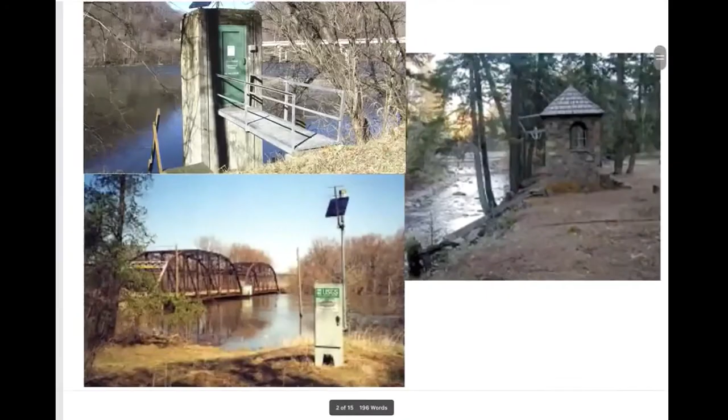All right, so first thing we're going to start with is just some field equipment. You don't have to draw this or write this down. It's mostly just as your FYI, because when we're talking about the weirs, the purpose of the weir is to get very calm waters so we can measure our stream flow. So this is just talking about measuring flow rate.

So what we would have in the field is this kind of tower here. It looks kind of like a little house, and then underground there's some connections. The connection essentially measures, so here is where we're measuring the pressure head.

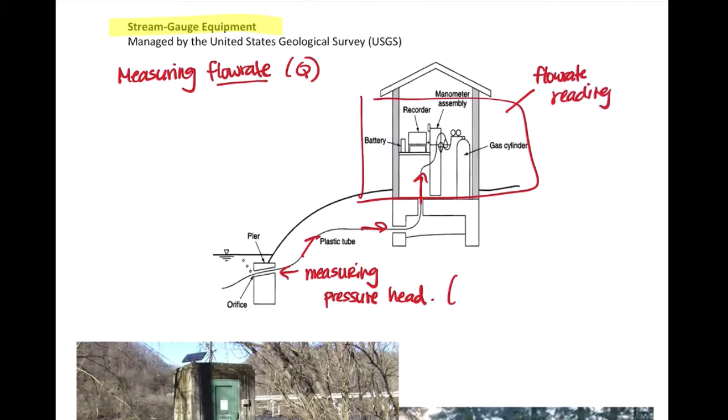That information is passed back to the machinery in here, and this translates to a flow rate reading, because the piezometric head, or H, from years and years of gauging and measuring, there's a relationship between that piezometric head and flow rate. And so this makes that calculation, and it estimates the flow measurement.

Now, back then, that information was recorded on site, and somebody had to hike into the site and download the data, very old school. Now they actually have an antenna attached to the site, and that is transmitted to a local station, so we get real-time measurements of flow rate. Someone's usually behind the desk to make sure the data makes sense.

So these are examples of what they look like. This one's one of my favorites, this is like a little house on the side of the stream. So if you're ever walking in your favorite watershed and on your favorite trail, and you notice a house like this, that's most likely a stream gauge.

This is also a stream gauge managed by the USGS, which is the United States Geological Survey. And this tower is actually very high up, because this is a very, very large, very wide river, so the channel depth can get very high. So it's at a higher elevation, very high up, to basically account for that, so it can get an accurate measurement of that piezometric head.

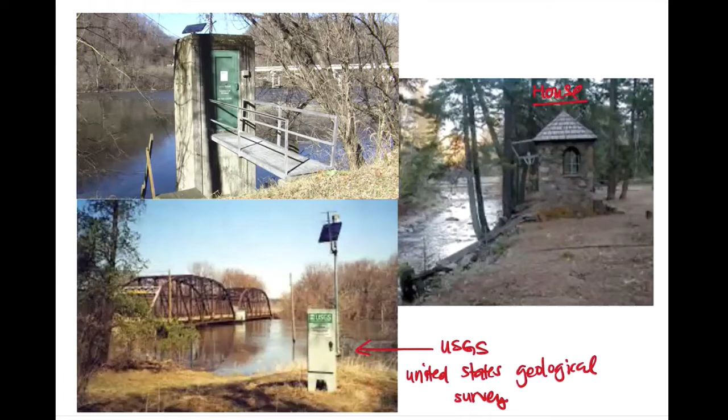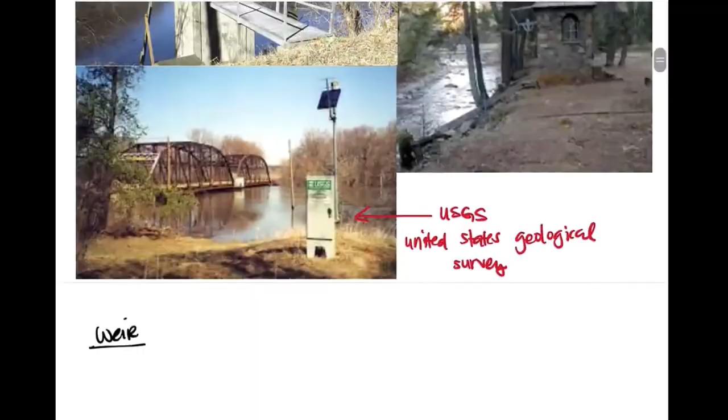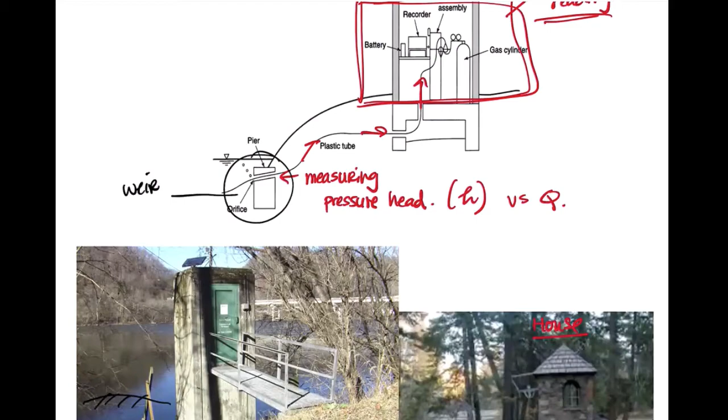So these are examples of how you would measure that flow rate. I want to get into the types of weirs and what they're used for. So what you can't see in these pictures is that on the side of the river is usually where you would see this structure, which would be the weir. So it's showing here, this is the weir, and they're hand in hand. Where you measure the flow rate in the river, you would have some kind of weir, some structure in the river to give us these ideal flow conditions.

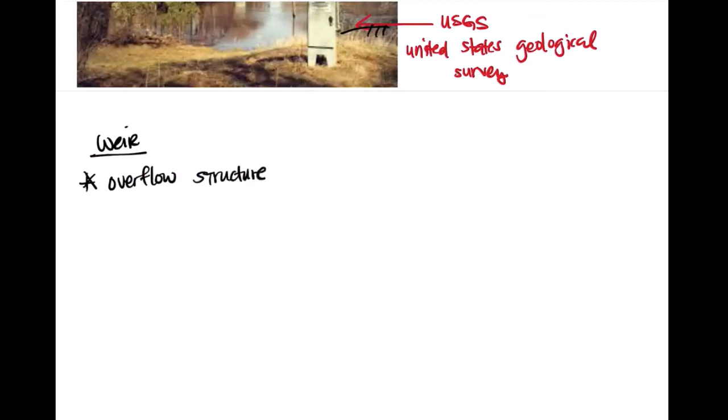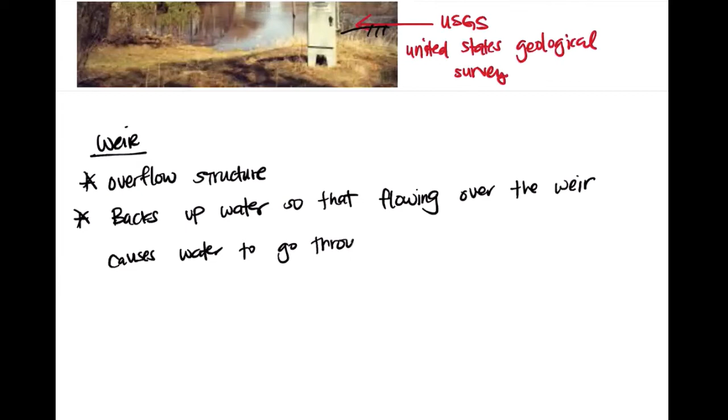So the weir is an overflow structure. It backs up water so that flowing over the weir causes water to go through the critical depth.

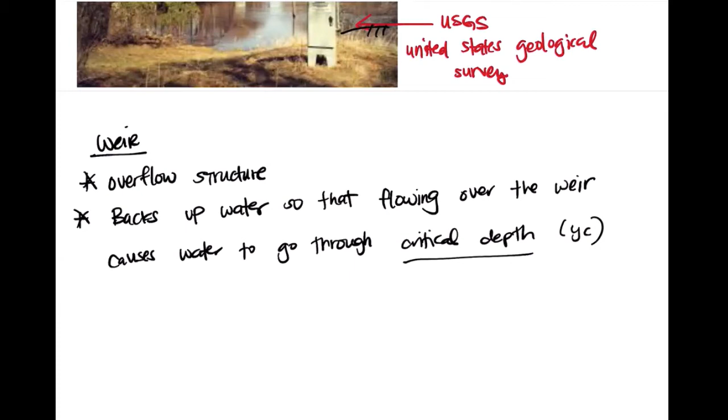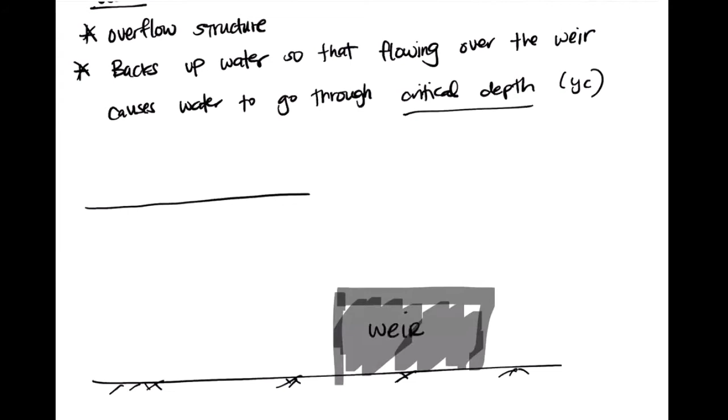Okay, I'm going to go into my notes and copy and paste some pictures to fill in. Actually, I can just do a sample here. So here's the water backed up, and then we have this structure here, this would be my weir. And what's happening to the water as it approaches the weir, it actually starts, the level starts to go down, until it falls over the weir.

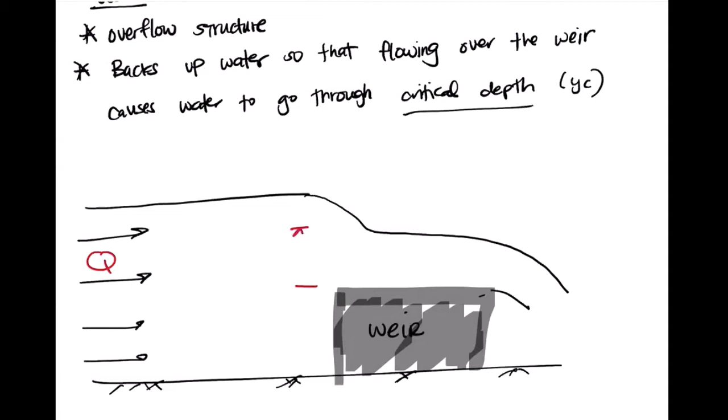So you have some flow rate approaching, right? You have some elevation of the water height above the weir, that's called H. Again, that flow rate is conserved as you're traveling over the weir.

There's different types of weirs that you could have. So this is a drawing of what's called a broad crested weir, but there are many, many types.

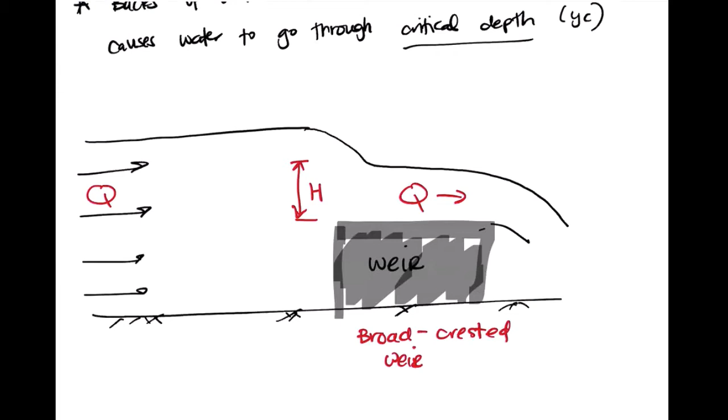So what I'm going to do is I do have photos of what those weirs look like. So this is the first type of weir, it's called a suppressed rectangular weir. What's different between the broad crested weir, which is a very wide structure that I drew earlier, this suppressed rectangular weir is actually quite narrow. So this is an example here in the field of that suppressed rectangular weir, it's very thin.

So it's a thin structure, and there's something called a nappe, where the nappe is that overflow, the width of that overflow. So the width here of your suppressed rectangular weir is about the width of the overflow. So that nappe here, super narrow.

And as the water flows over the weir, somewhere around here we have our critical flow. Back here we have subcritical. And over here we have our supercritical. Okay, so this is an example of the rectangular weir.

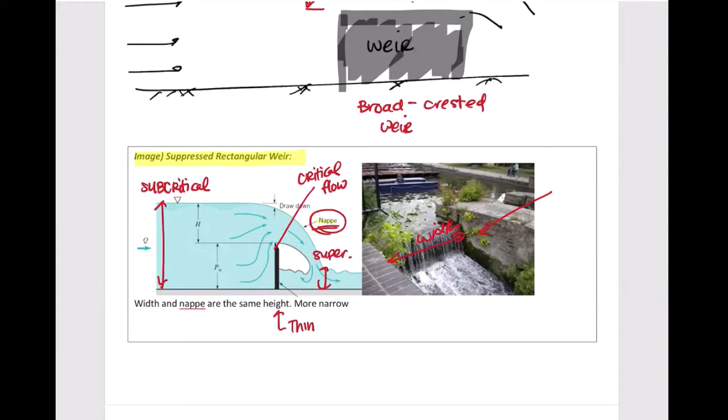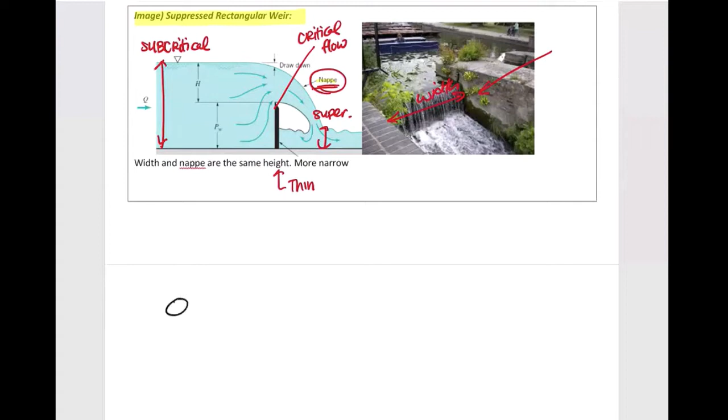The other weir, let's add some equations. So typically what you would be calculating is either the flow rate. So the flow rate is equal to CW B H to the 3/2. So you would typically be calculating either the flow rate, or perhaps you're given the flow rate and you might be calculating H, where H is that elevation above the weir to the top of the water.

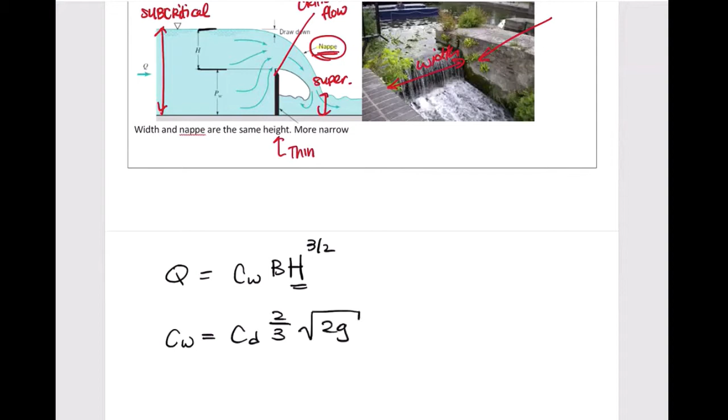So to calculate this, I have to provide some constants. CW is CD multiplied by 2/3 multiplied by the square root of 2 multiplied by gravity, where CD is approximately 0.62. So this is a coefficient that's used to calculate that

coefficient for the weir. So the only difference between the calculation is just going to be your gravity value. So there's some standard values where CW is approximately 3.334 for BG units, or 1.84 for SI units. Okay, and CW is called the weir coefficient.

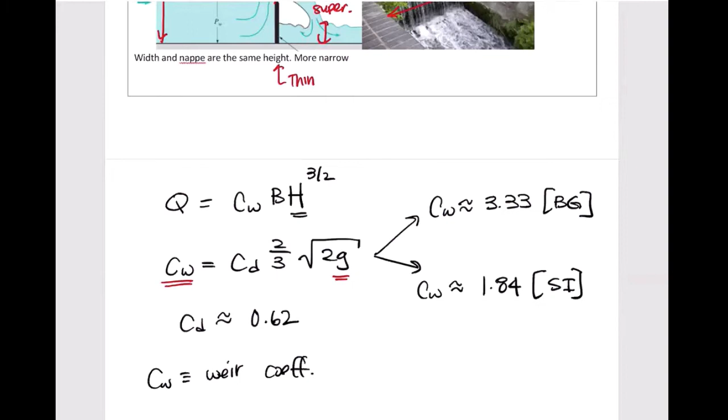B is equal to the base distance from crest to still water, which is not included in the drawing, but it's actually right here. So you have some distance B here. So in the problem statement, it'll typically say something like, how

high should the weir be placed if we're to maintain an upstream depth of blah, blah, blah, blah. Or we would say something like the distance from the flow measurement to the weir is approximately 5 feet. So that would be your B.

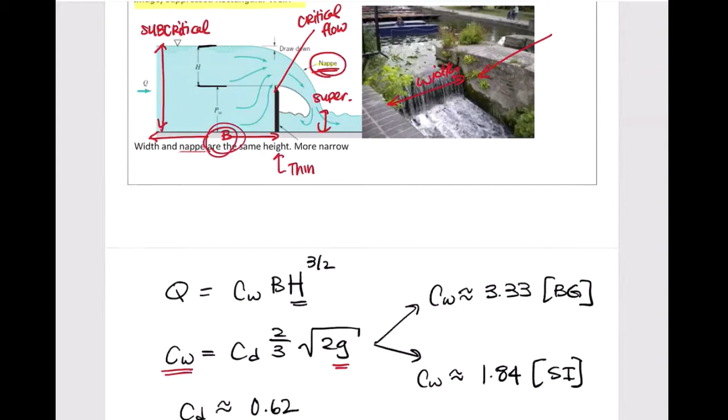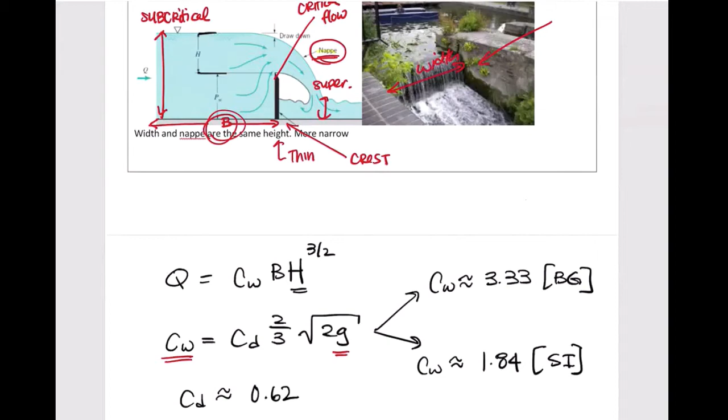Is the crest labeled in there? Oh, this is the crest, sorry. The arrow's cut off. That is your crest. So the distance from the weir to some upstream distance where we have some flow measurement, or where we have some standard height of the water.

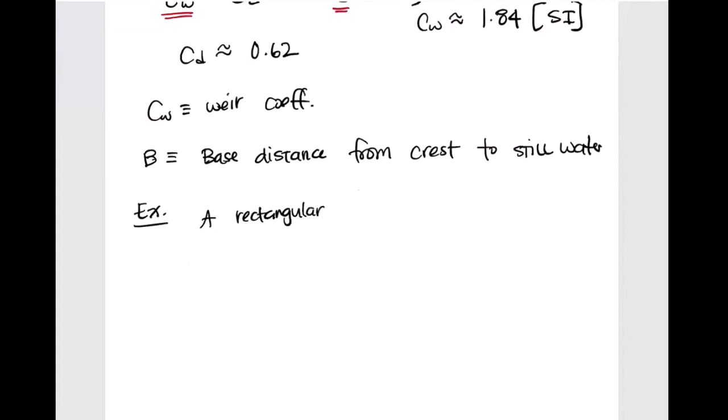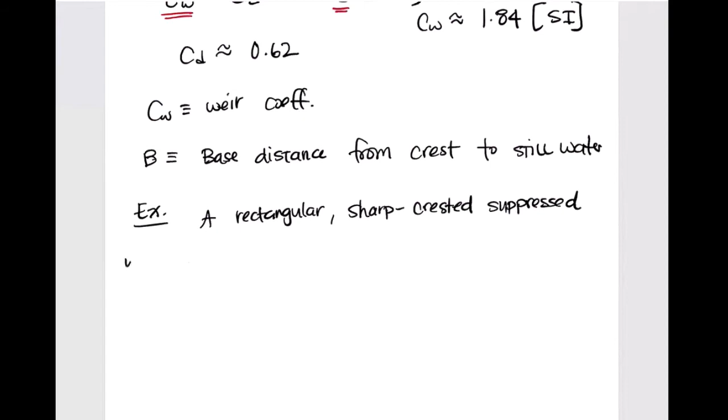Okay, so let's do an example using this equation. So we have a rectangular, sharp crested, suppressed weir that is 3 meters long, is 1 meter high. Determine the discharge when head above the weir is 150 millimeters. Okay, so we're in SI units, right?

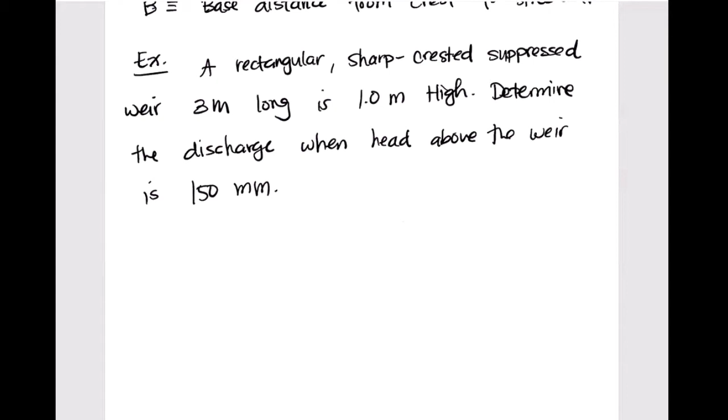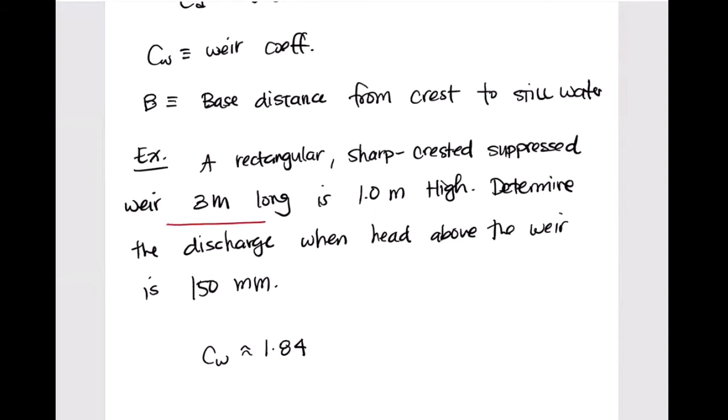We're in meters. So that means our CW is approximately 1.84, okay? We're given that the sharp crested weir is 3 meters long. That is going to be our B parameter. And let's see, what else do we have? We have our head, this is going to be our H.

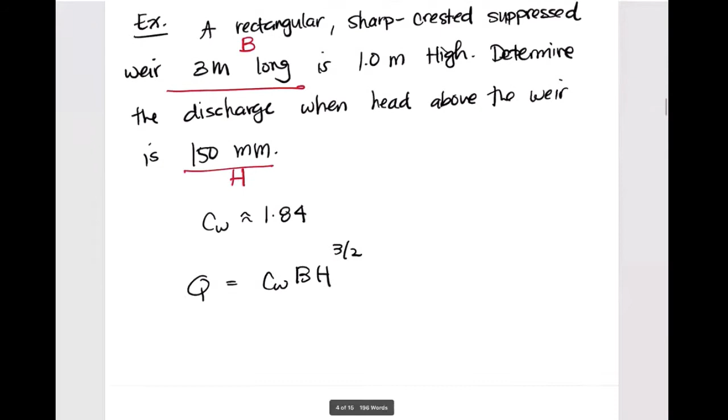So Q, which is CW B H to the 3/2, is 1.84, B is 3 meters, H is 150 divided by 1,000 meters, to the 3/2. So what is my flow rate going to be? 0.32, and that's going to be meter cubed per second. Okay, if you're not paying attention, I'll just let you know the next problem is not going to be this easy.

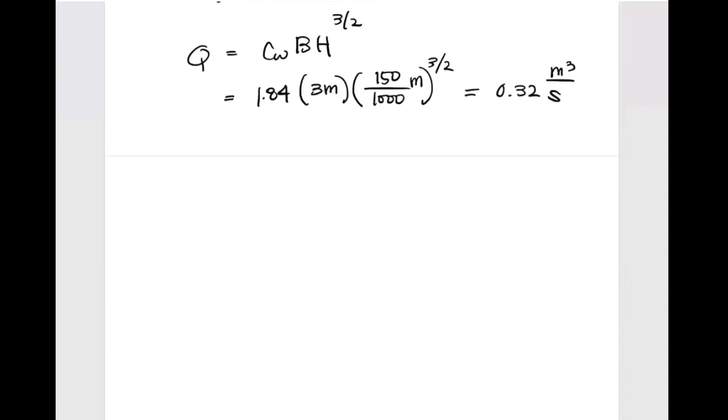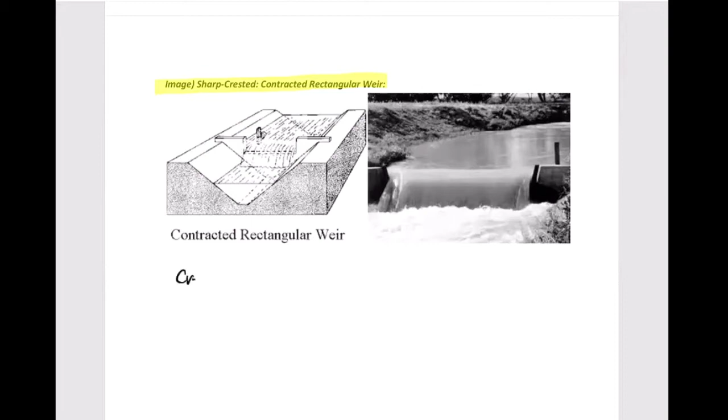Okay, so that's one type of weir. That's the sharp crested suppressed weir. The next type of weir is a sharp crested contracted rectangular weir. For this particular weir, the crest is shorter than the width of the channel.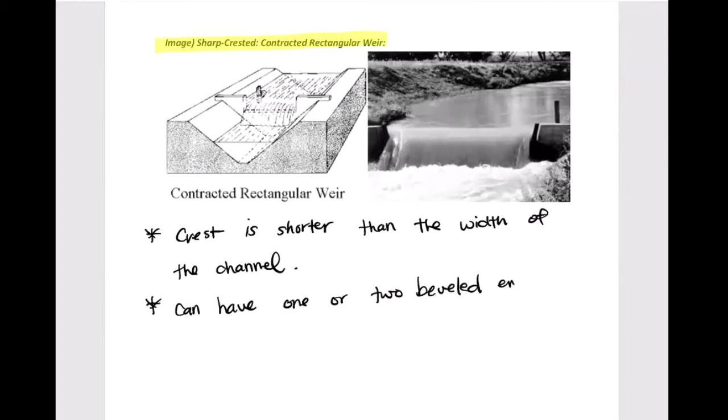It can have one or two beveled end sections. So water contracts horizontally and vertically.

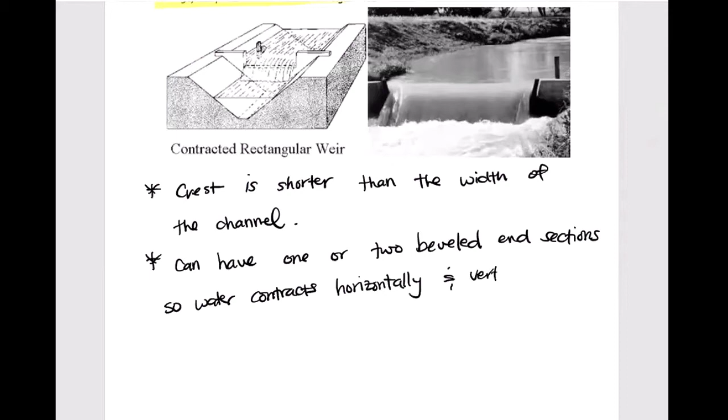Okay, so here is a drawing showing these contractions. So this right here and this right here, these are our contractions. Okay, and it kind of shows you that there's this structure right underneath the water that causes it to contract, vertically as well as horizontally. So it's contracting here and here.

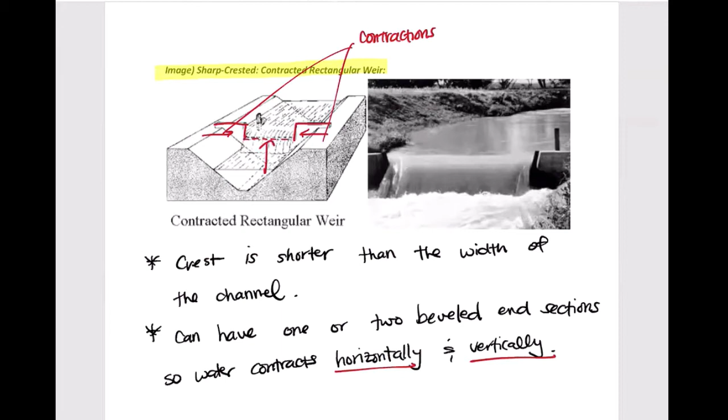Now, you don't have to have two contractions. You can have one contraction, that's fine. You just have to make note of it because that does change your calculations a little bit.

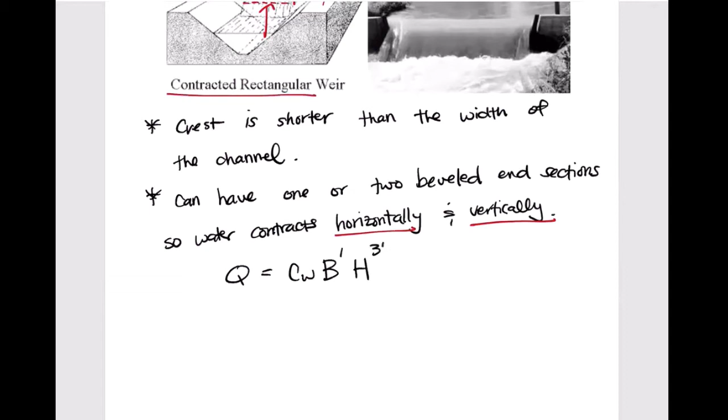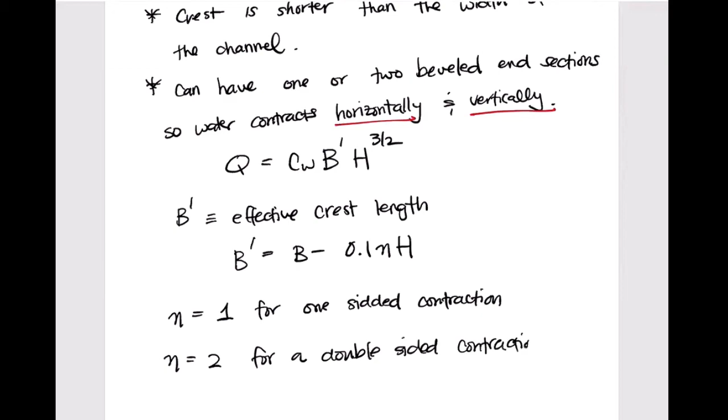So the equation for the weir flow rate does not change. However, instead of B, it's B prime, specifically for the contracted weirs. So it's B prime H to the 3/2, where B prime is called the effective crest length, and B prime is equal to B minus 0.1 NH, where N is just the number of contractions. So it's 1 for a one-sided contraction, or N is 2 for a double-sided contraction. So if you go back to the picture here, this would be a double-sided contraction, okay? So N would be 2.

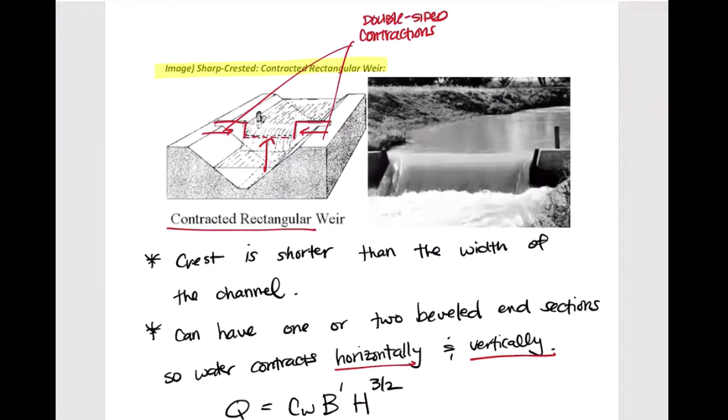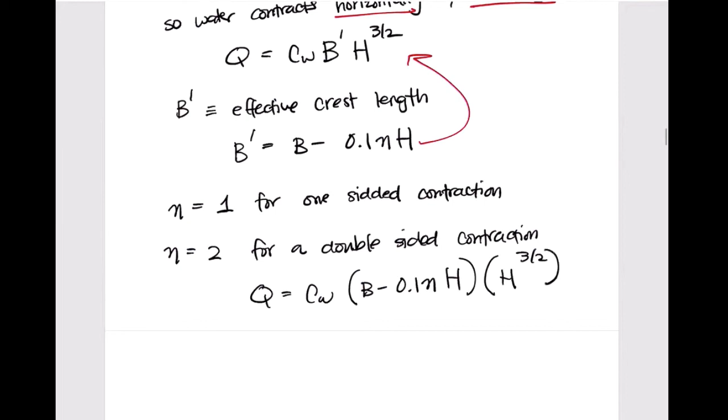Okay, so this can actually complicate things a bit, because if you put this B prime into this equation, then your Q is CW multiplied by B minus 0.1 NH, multiplied by H to the 3/2. So when you distribute that H, this is going to be H to the 3/2 multiplied by CW, B minus 0.1 NH to the 5/2. Do you see that?

If you have a problem similar to the previous example where H is given, if you know H, then this becomes a plug and chug. But if you don't know H, then what does this problem become? It becomes an iteration problem to solve for H. So I'm going to put a note here that if H is unknown, then you must iterate to solve. That is the contracted rectangular weir.

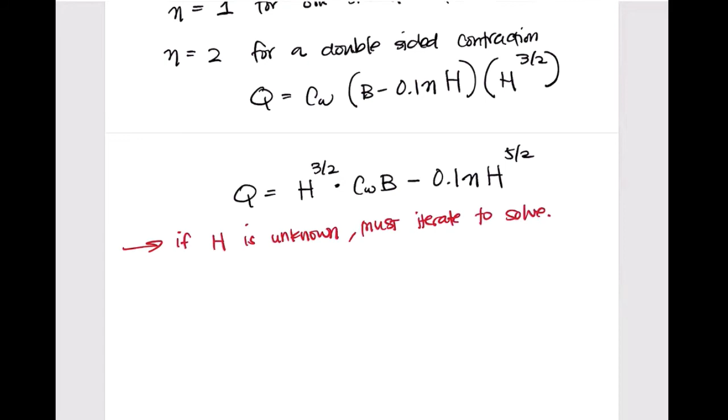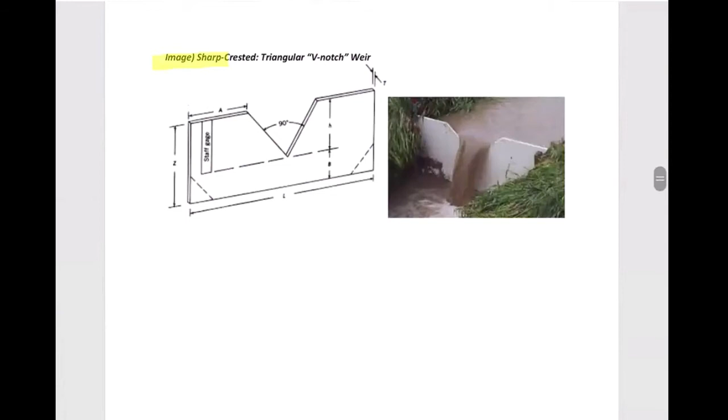We have 2 more weirs coming. So the next type of weir is a sharp crested triangular V-notch weir.

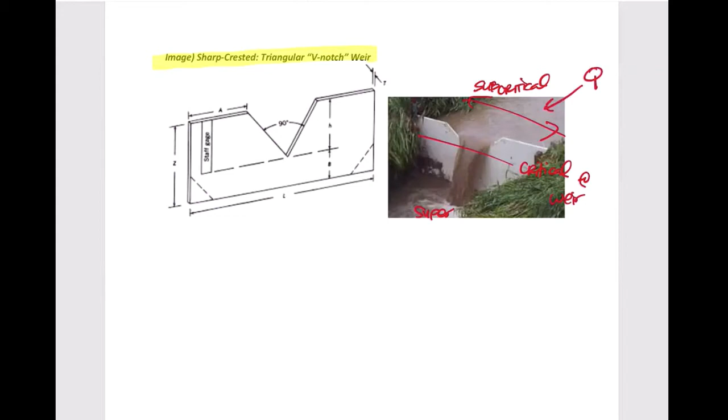Again, the whole purpose of the weirs is to back up the flow, create this critical condition. We have subcritical conditions in the back end, critical conditions at the weir, and supercritical on the release side. It's to get that controlled flow so we get a reasonable estimation of flow rate, because we need to back up that depth in order to get a reasonable estimation. Flow rate here is the same as the flow rate here, via conservation of mass. It just makes it easier for us to get that measurement.

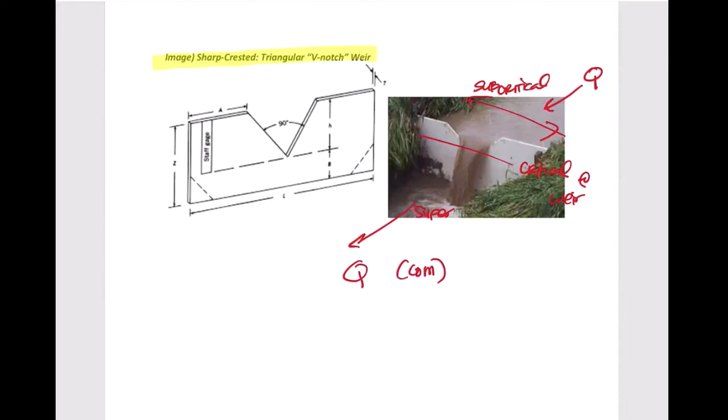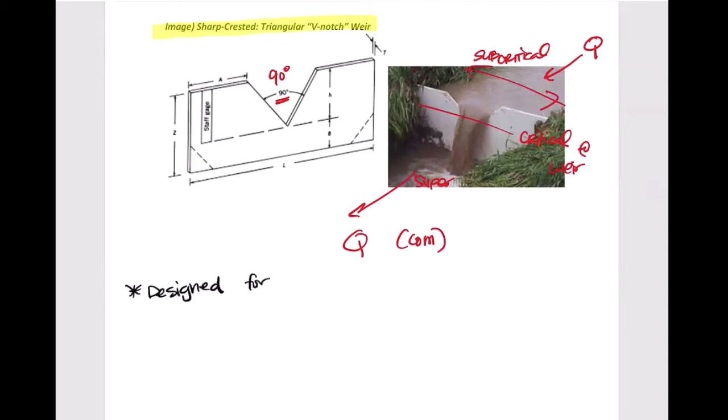So this is our triangular V-notch weir. As you can see here, this angle is 90 degrees right here, so that is the most common angle. It's typically what we use for a triangular weir. It's designed so we use these types of weirs for relatively small flows, to back up the head, back up the water, raise the water height so we can get a decent flow rate measurement.

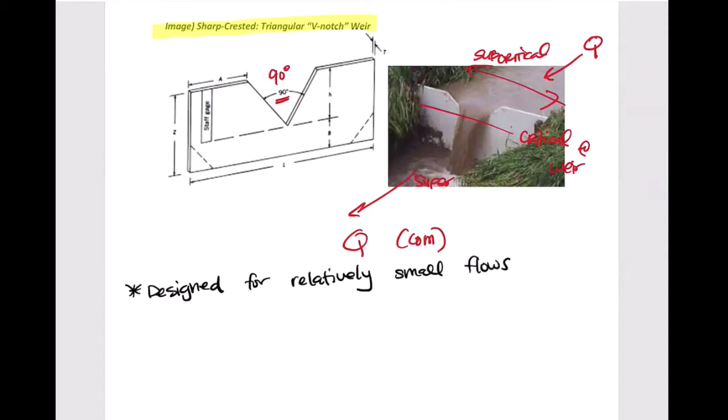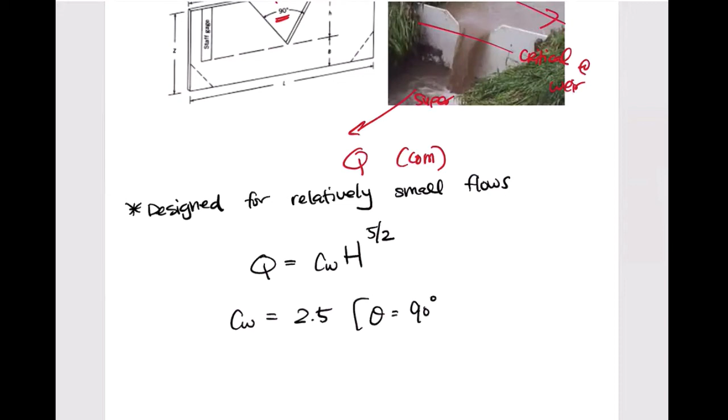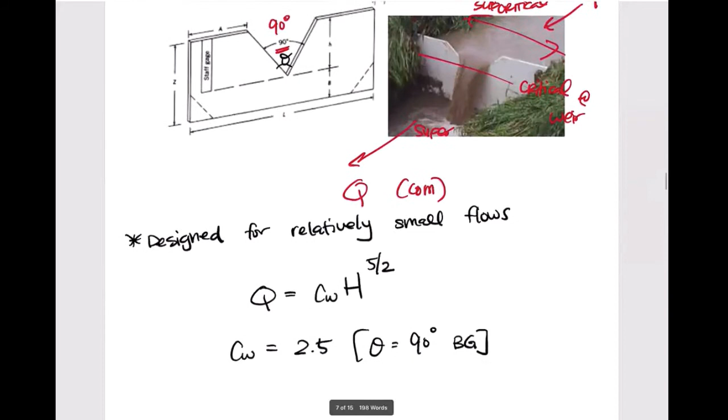The equation specifically for a triangular V-notch weir is Q equals CW times H to the 5/2, where CW for this particular type of weir is 2.5. Again, that's for theta of 90 degrees, if this is theta right here for the triangular weir, and that's for BG units. Our CW is approximately 1.38, again for that 90 degree triangular weir in SI units.

Any questions so far about the types of weirs? We have one more to go.

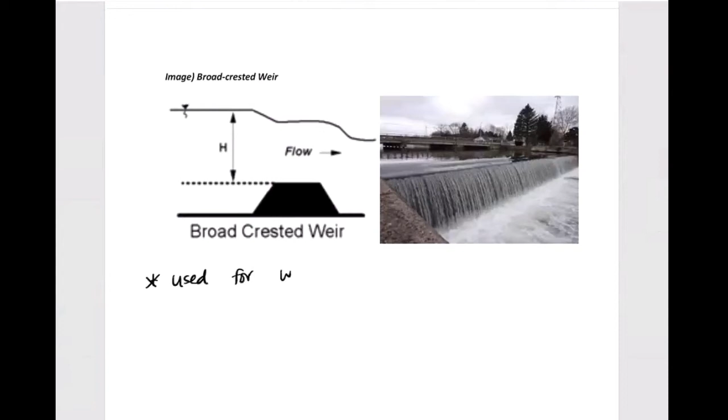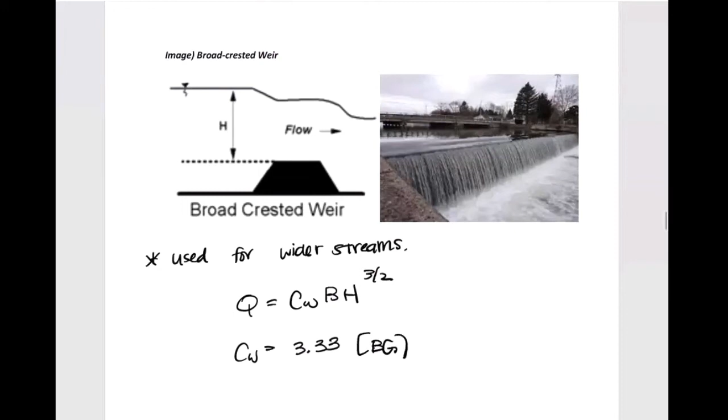The equation to solve this is the same as the other, CW times B times H to the 3/2, where CW from the original suppressed rectangular weir is 3.33 for BG and 1.84 for SI. So this one, actually, the broad crested weir, is the most commonly used type of weir for larger rectangular channels.

All right, so that's it for the weirs. The next thing we're going to be talking about is a flume. I've had a lot of experience using both the weirs and the flumes in the field. The flumes actually are the most common.

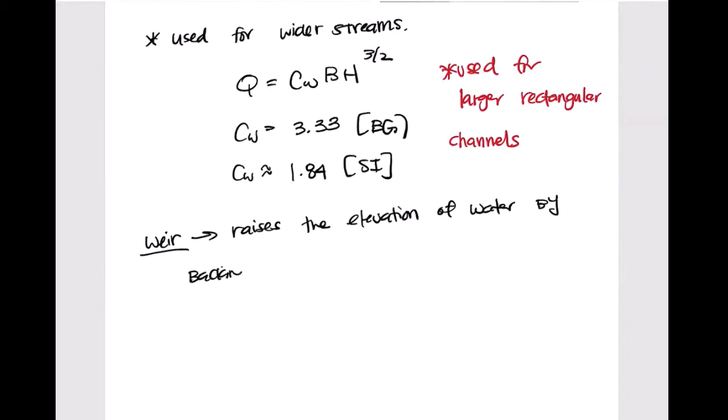The goal is the same with weirs and flumes: we're trying to control the flow pattern so we can get a good estimation of that flow rate. The weir raises the elevation of water by backing up flow. The flume does the same thing—it raises the elevation of water by narrowing the flow.

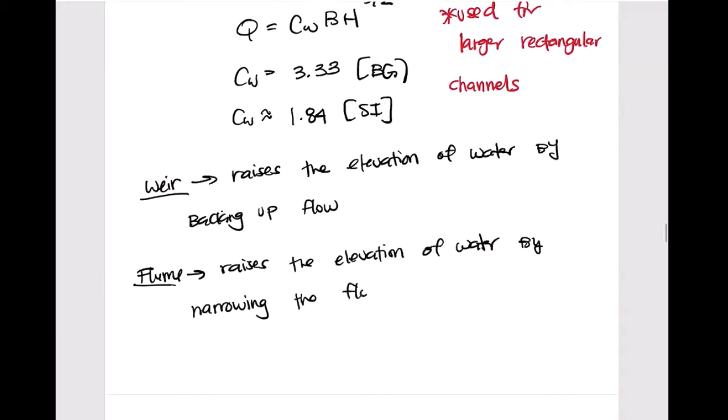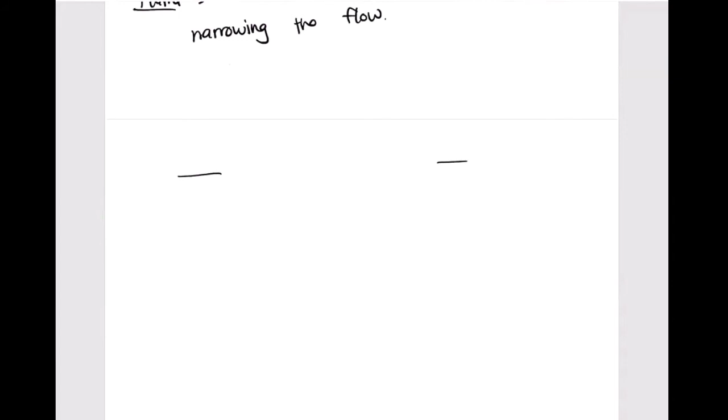Let's have a diagram comparing the weir and the flume. If we have a cross-sectional view of a trapezoidal channel, the weir is placed here. So this would be where your weir is, for instance, a broad crested weir.

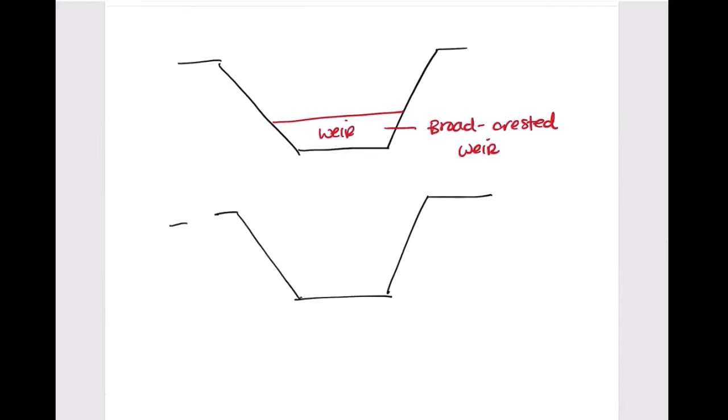But when we're considering a flume, again, we're going to look at that cross-sectional view. What we're actually going to be doing is narrowing—we're going to create a structure that narrows the channel. So this and this would be the construct of the flume.

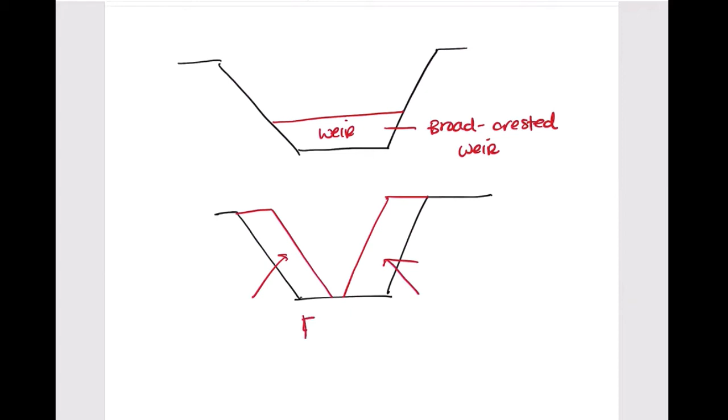It's typically installed in the channel. So I'll draw an overhead view of what that looks like. This would be as if it continued operating like a channel, and what you do is install this kind of structure to narrow the path.

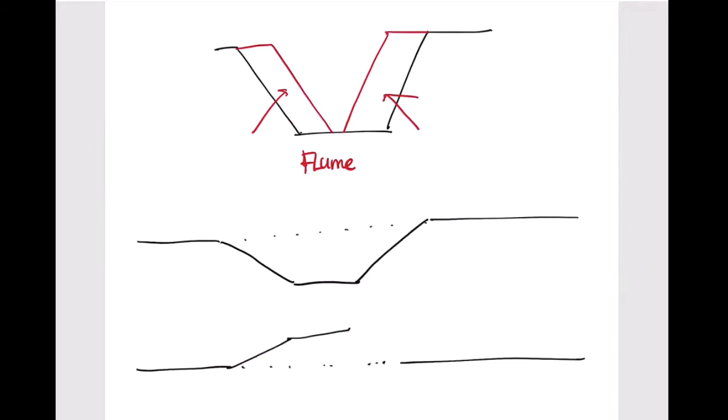This would be the crest, for instance, of a weir. So you can do a combination of the two.

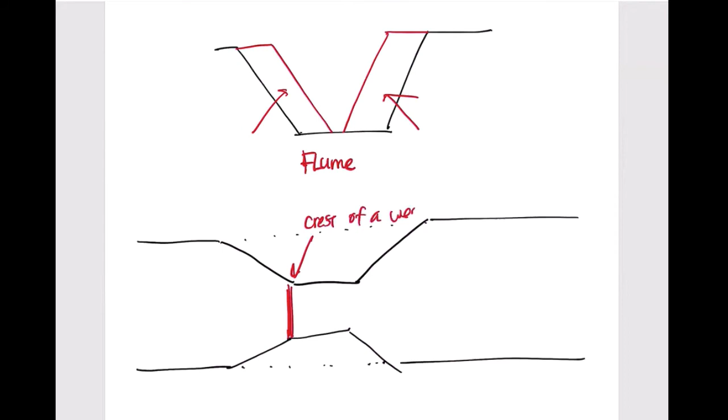I believe your book has an image, on page 134 and 135, that shows how we combine the weir and the flume to cause that flow to rise, so we can get a good measurement of that flow rate. So this is always the goal, getting this flow rate as it passes through the flume and as it exits on the other side.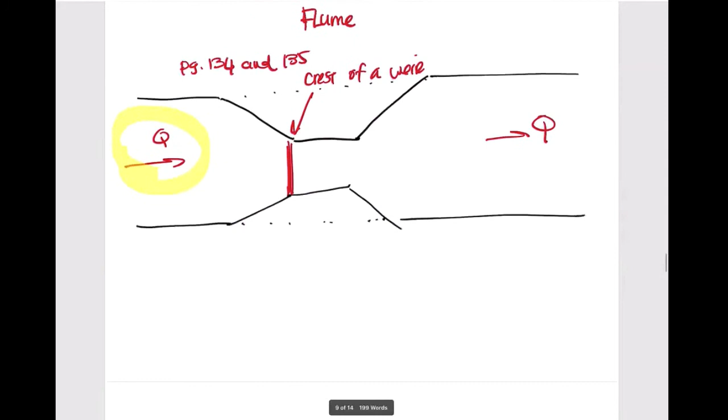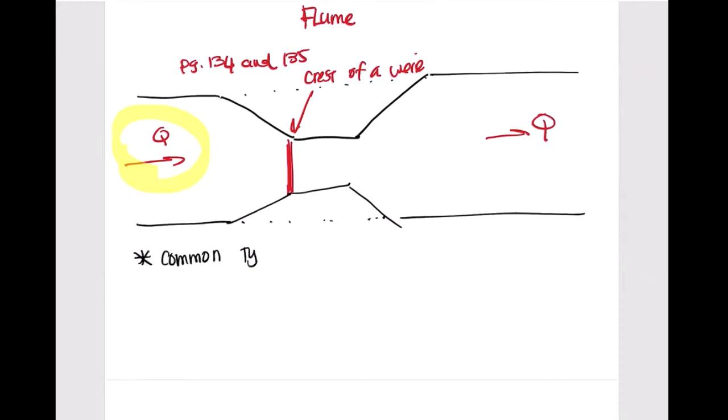So how do we calculate? If we just have a flume, the most common type is called a Parshall flume. Again, it's the most widely used, and that's from the U.S. Bureau of Reclamation.

From fluid mechanics, we had done some calculations of pressure differentials or velocity differences using a Venturi. Does anybody remember that kind of analysis? So this is a Venturi type flume, you can kind of see that structure here. If you remember, this was from fluid mechanics: we would have a pipe, we would narrow it, and then increase it.

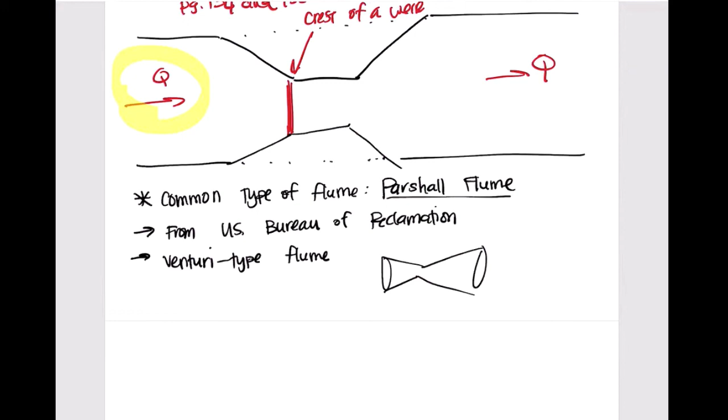So this would be the nose. We would narrow it, and then we would allow it to release. So the structure is very similar, except that it's an open channel. This is an open system.

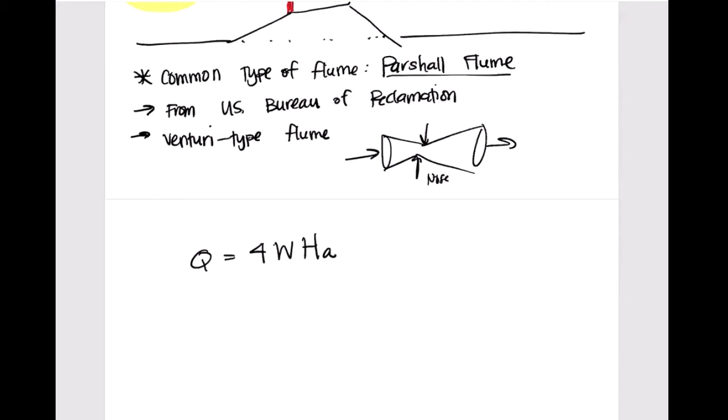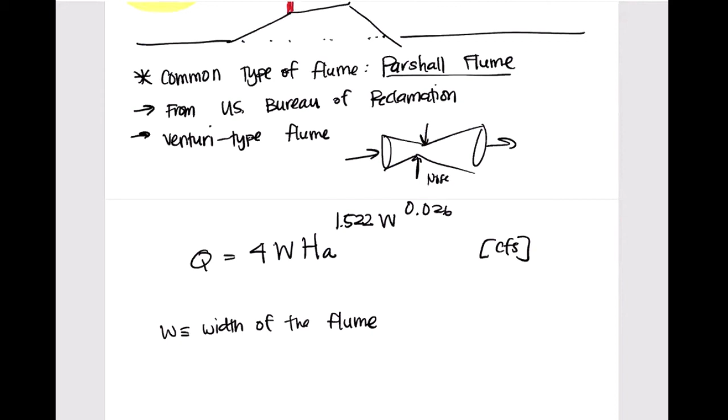So to measure the flow rate in a flume, we would use this equation: Q is 4 multiplied by W, H sub A raised to the 1.522, W raised to the 0.026, and this would be in CFS. So W is the width of the flume. If we go back to this picture, this is the width here.

And H sub A is the upstream head, the upstream depth. We could also have... so this is the typical equation for a flume. There are alternative equations for flumes for smaller structures, but we're just going to focus on the larger flume.

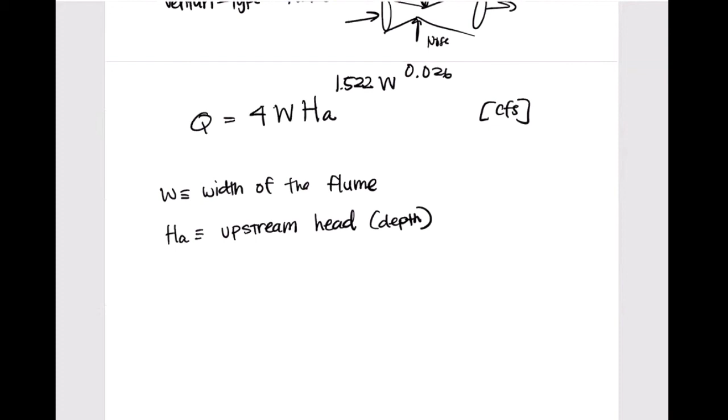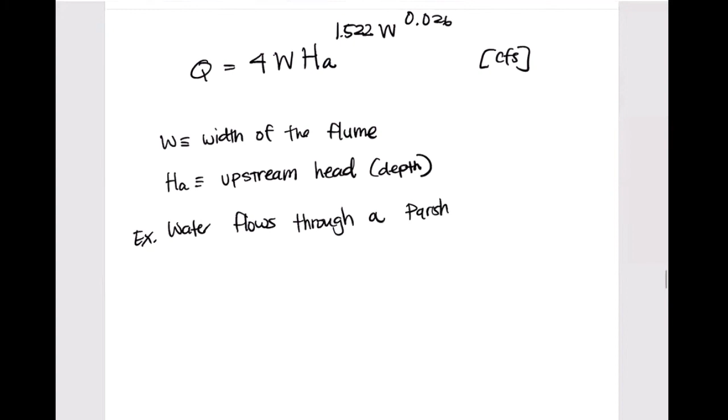As an example: water flows through a Parshall flume with a throat width of 4 feet at a depth of 2 feet. What is Q? So we're dealing with a width of 4 feet and our depth, which is H sub A, of 2 feet.

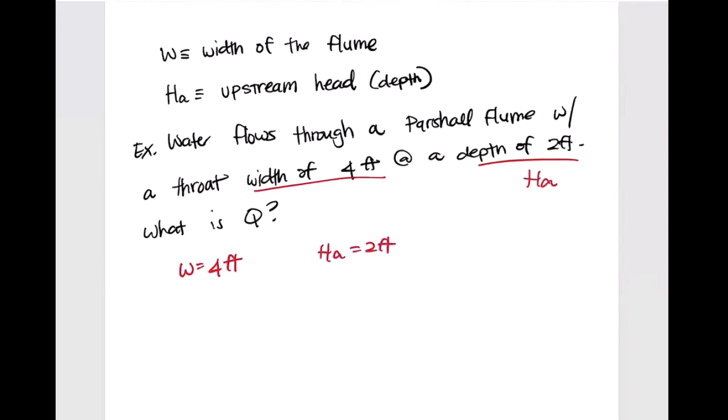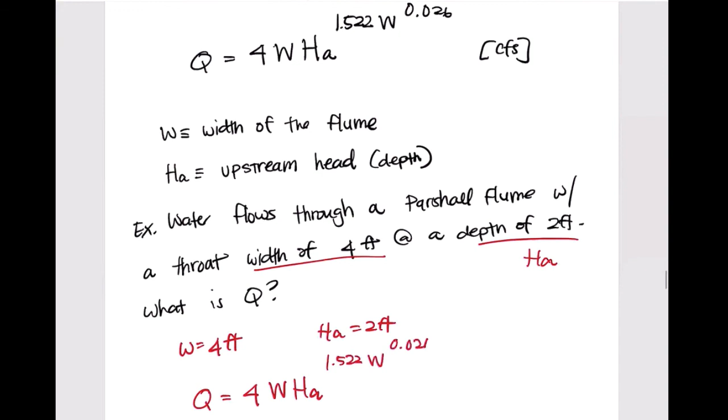So we're trying to find Q. We would plug that into our equation, where Q is 4W times H sub A raised to the 1.522, times W raised to the 0.026. So Q is 4 multiplied by 4 feet, multiplied by 2 feet raised to the 1.522, multiplied by W, which again is 4 feet raised to 0.026.

This is one of those occasions where I have to tell you, don't worry about the units in this equation. Does anybody know what this type of equation is called in mathematics? This equation is based off of several experiments, so it's called an empirical equation. Sometimes empirical equations are based off of experiments, sometimes off of field measurements. They sometimes neglect the units involved by adding coefficients and things like that. So this is an example of that. Just know that if your input is in feet, that's great, your output for flow rate will be in cubic feet per second.

So then what is my flow rate going to be? What is Q? I would say it's about 47.76 feet cubed per second. That's going to be our flow rate.

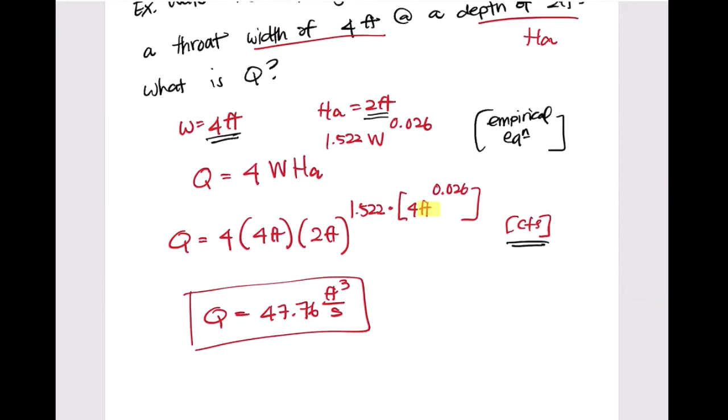Even if we're solving for our width, this becomes an iteration problem because the width is in two separate locations. So the simplest approach is if you're given the width of the throat and the head of the water. But if you're not given the width, then this becomes more complicated.

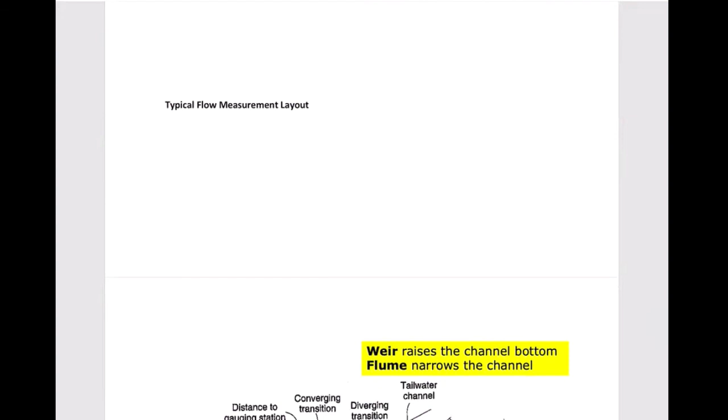I had mentioned there was a diagram in your book that shows the combination of the weirs and the flumes. So I copied that for the notes, and added a few things to it. This shows the combination of our flume and weir setup. You can see here's the channel, here's the flow approaching, going across this way. And we're causing the water to narrow with the flume and rise due to the weir.

All of these attempts are always made to back up that flow so that we have subcritical flow on the approach. So again: subcritical on the approach, critical at the weir, and supercritical on the other side of the structure.